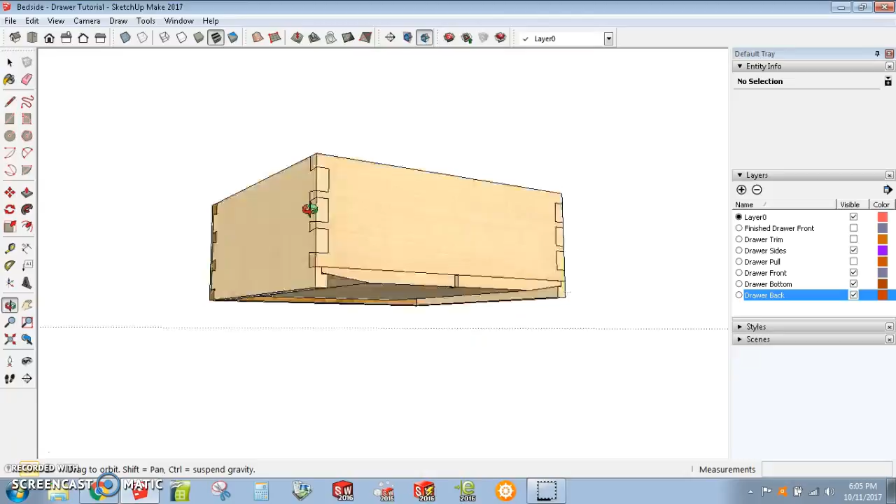So this is what you should have at this point. You should have two sides, a back, and a front. And it should look relatively box-like. You should also have a bottom. Alright, so let's look at what the finished product should look like before we start drawing.

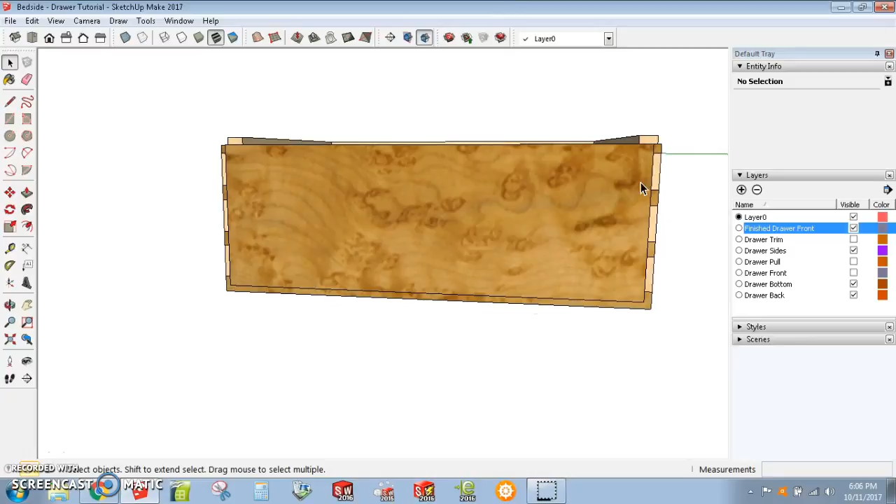So notice the front looks a little different. There's actually some material taken out of the front, about a 1/4 inch worth. And then there's a U-shaped sort of shoulder. Some more material was taken out on the sides and the bottom. And that shoulder is a 1/4 inch deep by, you guessed it, a 1/4 inch wide. And that allows the trim to fit in place.

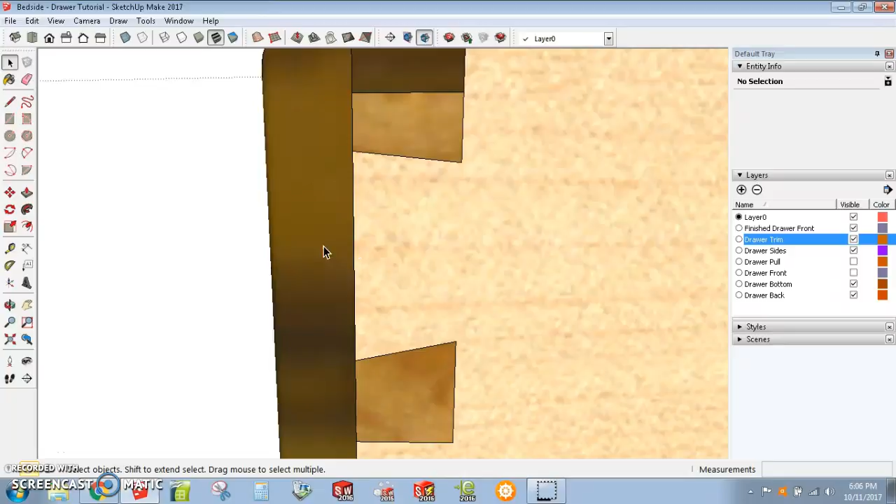So here's the trim. That's what it looks like. And you can see the trim sits against the base of that shoulder, and there's a little curved section that bulges out from the front face of the drawer. Finally, up top, this piece of wood sort of extends all the way back to the front face of the drawer side.

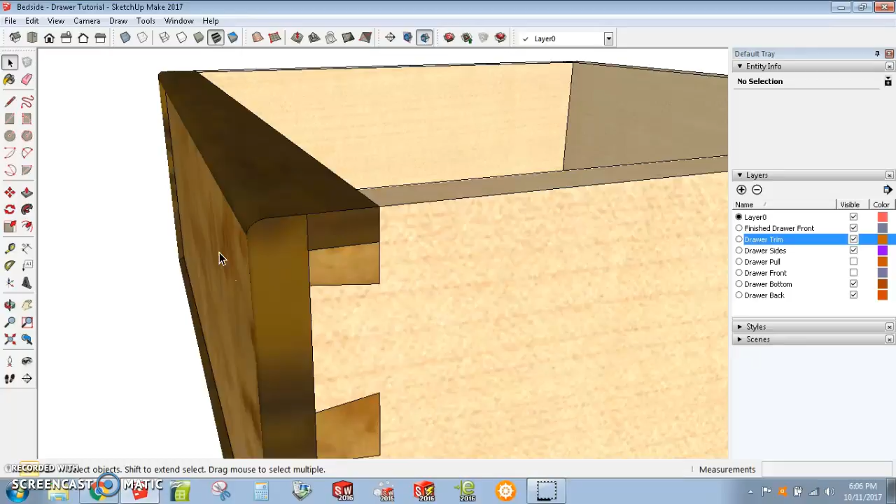So what we're going to work on is just this section right here. We're not going to worry about this. So we'll get the front face of the drawer done, and we'll do most of the trim. We'll save the rest for another video. So let's get started. So let's get everything we don't want out of the way. And let's show our front face.

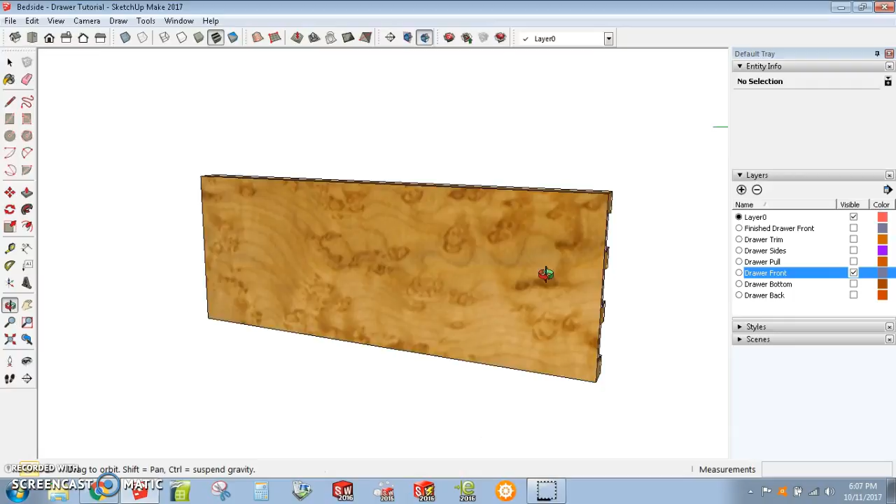So first things first, let's go into edit mode by double clicking. And now we can use the offset and come out a 1/4 inch. So we just want that U shape. We don't really want the U shape on the top, but let's try it anyway.

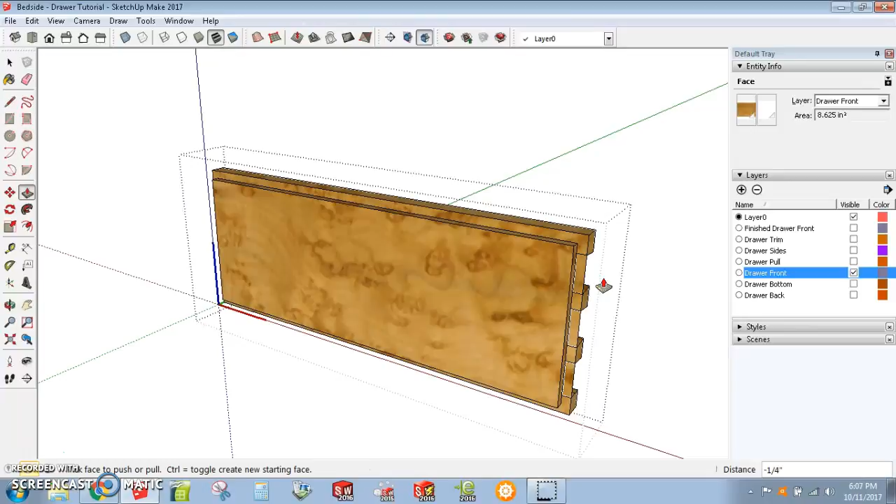Let's push the whole thing in a 1/4 inch, and you can see that we have some edges here that have been left behind by pushing that face back. So let's just delete that edge. Now you can see that it deleted some extra stuff. It's easy enough to fix. You do what's known as healing the edge. I'll delete all these edges first.

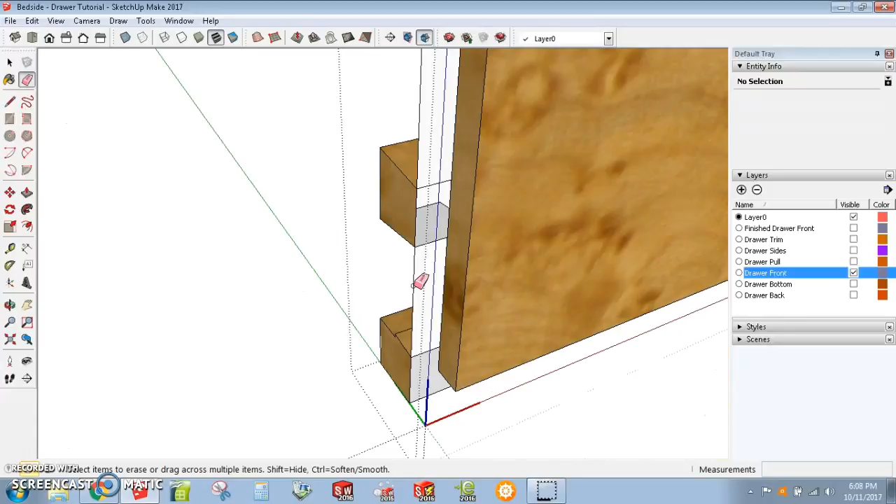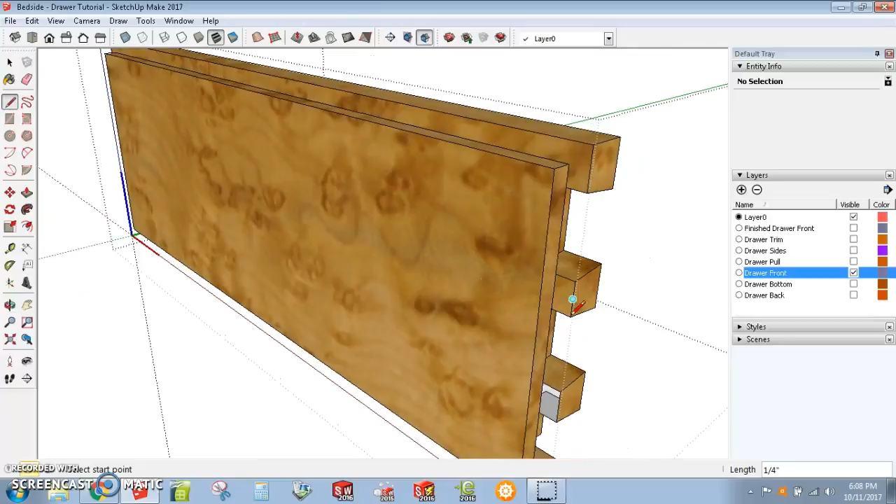Okay, and then you can heal an edge just by redrawing any edge that surrounds a face. See? So they come right back. No problem. We'll just do this side. Okay, and then finally, we want to finish shaving the top of this thing off. So we can take our line tool, and now we have this top strip. Push that right out.

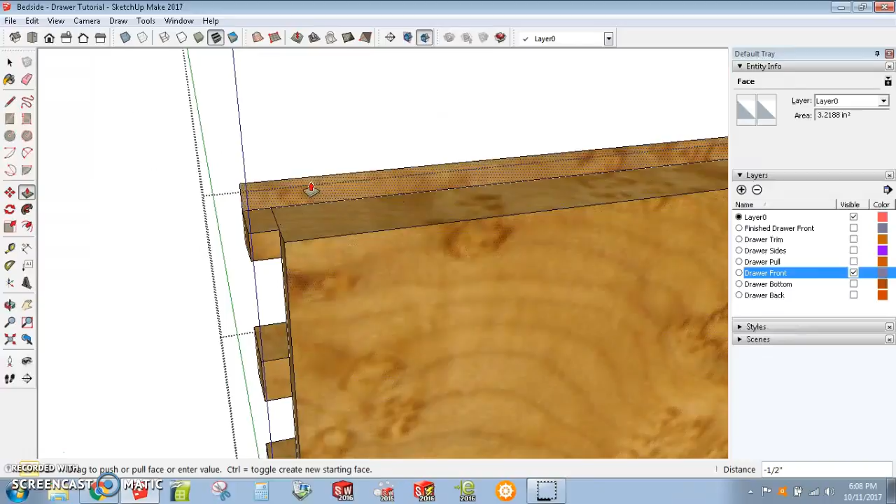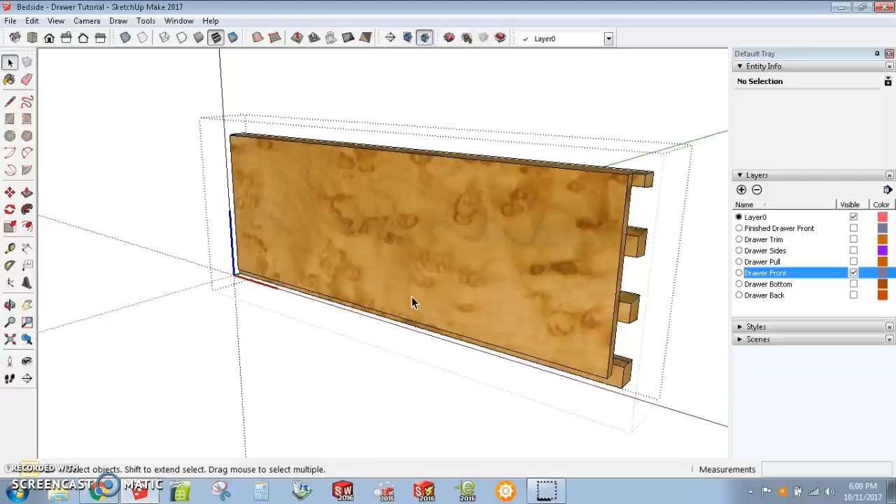Cleaning up our edges. And there's a random line here. That's cool. So we're just going to delete that. Excuse me. So there you have it. The front is ready for a piece of trim. So let's get out of edit mode, and now we can turn our attention to the trim itself.

Now to do the trim, what we're going to do is we're going to create a 2D profile of the trim, and then we're going to use Follow Me to extrude that around this front face. Now, in order to do that, we need to actually draw in a rectangle that's the same size and in the same position as the front face. Right now, this is not actually a rectangle. It's got all these things. Follow Me doesn't know what to do with that.

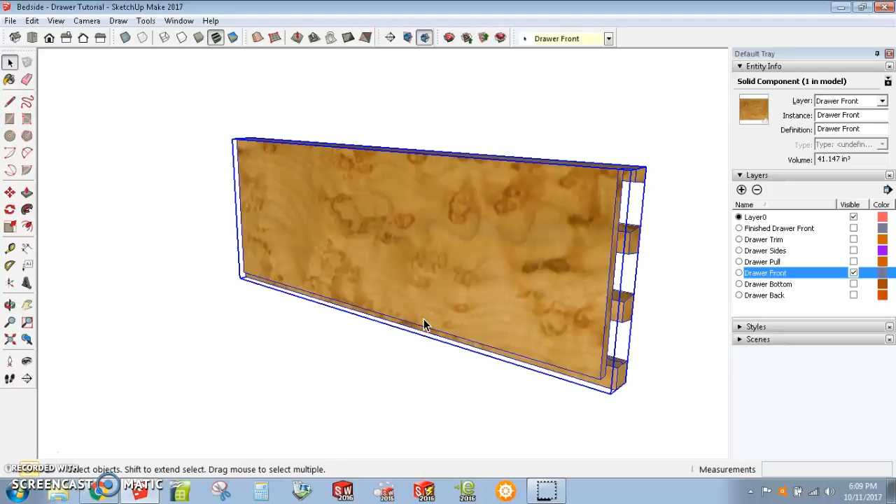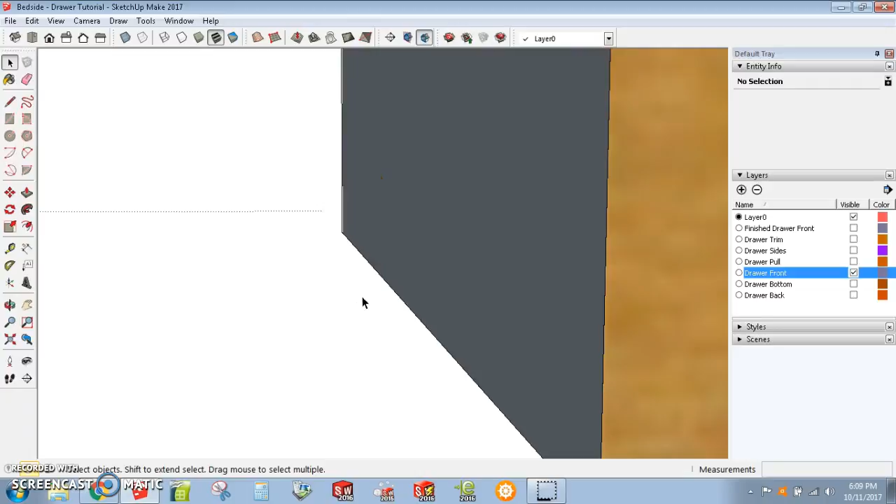So we're going to take our rectangle, starting at this corner, going all the way to the other. Now we can hide our front. And now we're just working with this. Now something to note before we start drawing is that we want to draw a 1/4 inch by 1/4 inch square here, and then we'll draw the bulge here. So only the bulge will stick out from the front face.

Okay, so here we go. So I'm going to start working from sort of the back of this. I'm going to take my line tool, and you can start drawing this anywhere along any of these edges. I'm just going to choose the bottom, and to be extra nerdy, I'm going to choose the midpoint of the bottom, but you honestly can do it however you want. So let's start drawing. Make sure your lines are going along the green and blue axes so that you know it's perpendicular to your face.

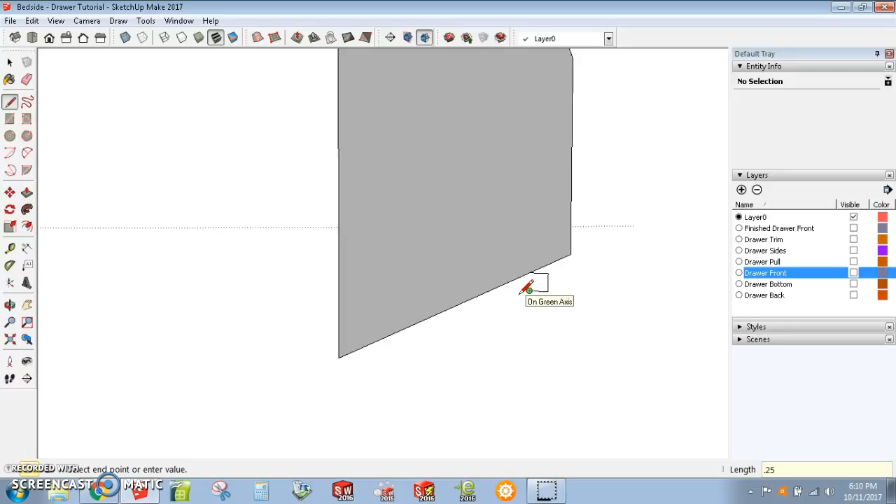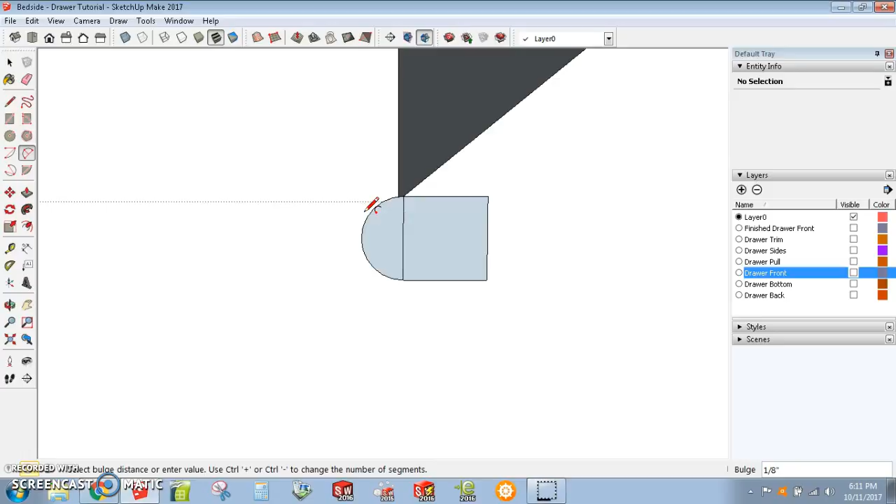So we're just going around 0.25. Now we got a little square. Let's get it on there. And next we'll draw the little rounded bulge there. So take the 2-point arc and click on one edge, click on the other, then you can kind of mouse and wait till it says half circle, and you can see that it's 1/8 of an inch. So just set it there. Now we have our general shape. We'll erase this line in between, and there it is.

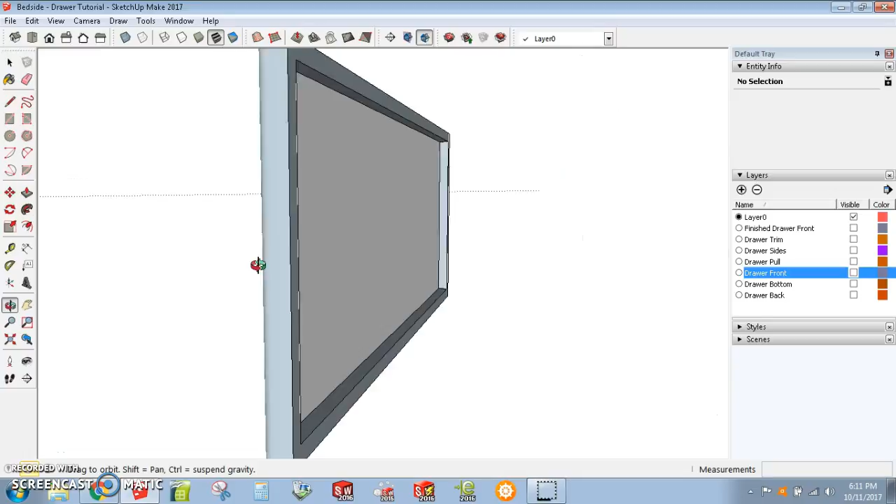So now, fun part. Click on the face we want to follow, grab the Follow Me tool, click. And there we go. So now we have a whole bunch of trim. And we have a face that we don't want. So just click on that and hit delete. Pretty simple, right? So let's just real quick triple click on it and make that a component. Actually, let's make it a group.

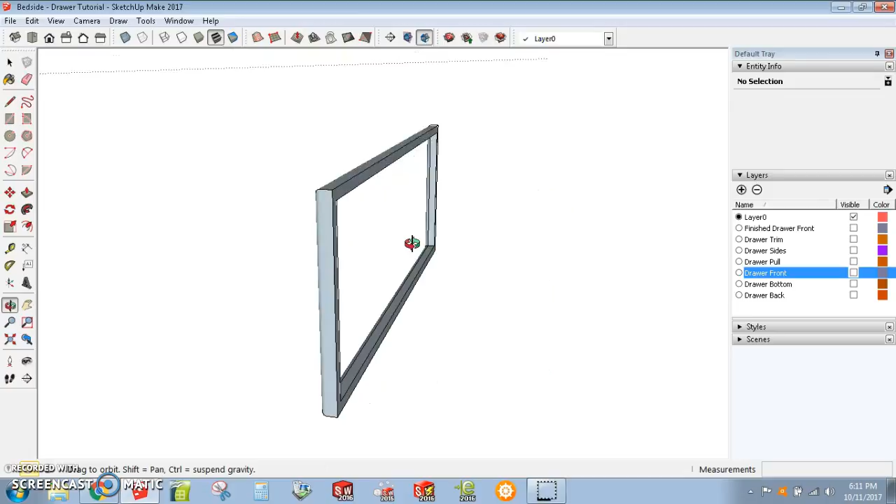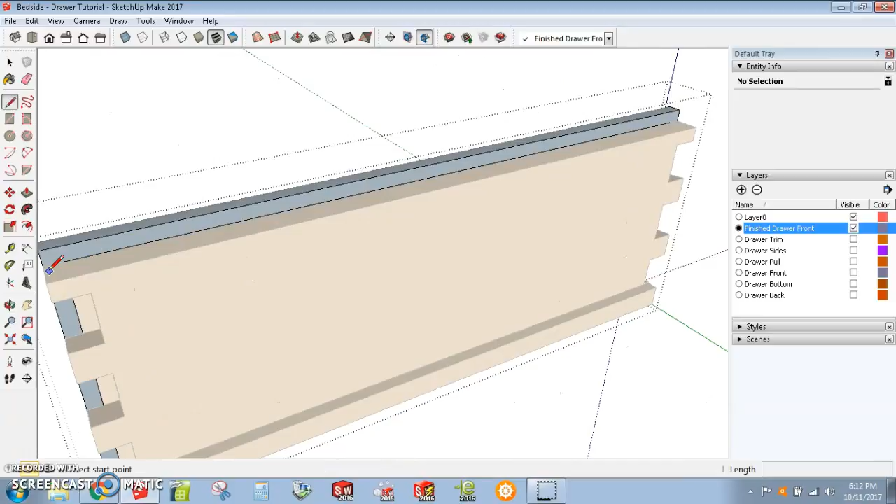Now let's see, how does that look up against our drawer front? I think that looks pretty good. What do you think? So I told you I was going to do this top piece in the next video, but let's just do it now. It takes 2 seconds. So go into edit mode, and you're going to draw a line. Go all the way to the other end. So now we have a little section we could pull, and we're just going to pull it to the inside face. And there you go. There's some trim.